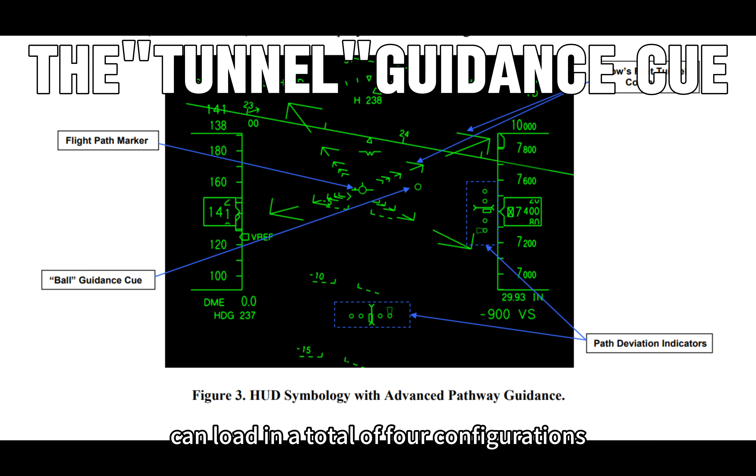The team conducted their experiment on a modified Boeing 757-200 flight simulator, the main addition being a head-up display that the researchers can load in a total of 4 configurations, them being: 1. Enhanced Flight Vision System plus Traditional Guidance Cue.

2. Enhanced Flight Vision System plus Tunnel Guidance Cue. 3. Fusion plus Traditional Guidance Cue. 4. Fusion plus Tunnel Guidance Cue.

Yes, guidance cues. The ability to display computer-generated imagery of the environment outside also enabled researchers to make the guidance dynamic. The scientists hope that using the new tunnel guidance cue will be literally like playing a video game, but it is still a new concept that needs sufficient testing.

24 pilots are being cycled through 4 sessions, each being a new HUD config, and after 9 hours of immense simulator time, all the data are collected and ready to be analyzed.

After months of data analysis, the results are finally available.

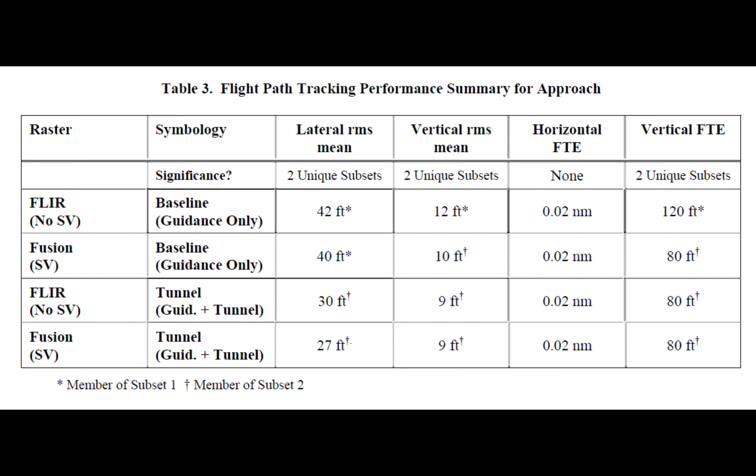The path control segment of the study shows the guidance cue selection makes a great difference, with the tunnel design significantly improving landing accuracy, while the difference between Fusion and EVS is small in comparison. Fusion still provides slightly better accuracy.

As to workload, discussions with the pilots show that Fusion plus Tunnel has a workload substantially lower than the other three, which is surprising to some researchers who fear the excess of info might overload the pilots.

The paper commented, 'The presence of the tunnel gives the pilots a better understanding and appreciation of the curving, descending visual arrival path.' Also, the SV component in the Fusion HUD concept provided significant terrain information unavailable in any other cockpit displays, thereby providing an intuitive conformal display of terrain and pathway information. Therefore, the improvement of situational awareness is also apparent.

However, one question still needs to be answered. Is this safe? The aviation industry is delicate, and any new technology needs to be super safe for it to be approved. To answer this, the research team injected non-normal situations into the scenarios, including runway incursions and navigation errors.

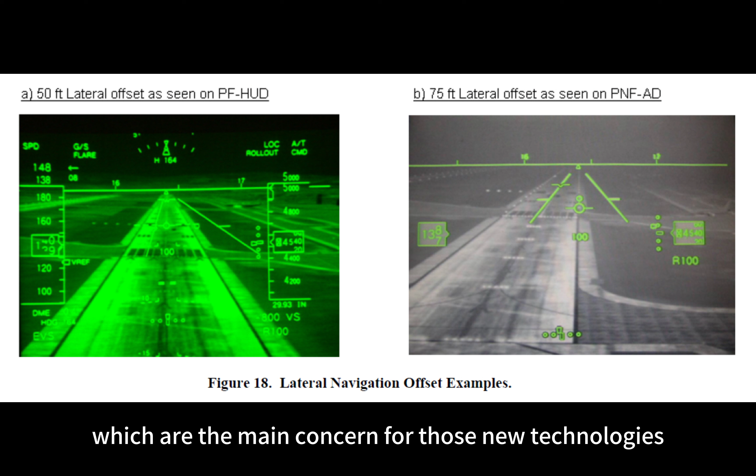In the runway incursion scenarios, the presence of EVS theoretically improves the visibility and increases the visual range of anomalous objects, but in practice it does not introduce any significant differences. Navigation errors, which are the main concern for these new technologies, turn out to be relatively easy to identify and do not appear to be a threat to flight safety.

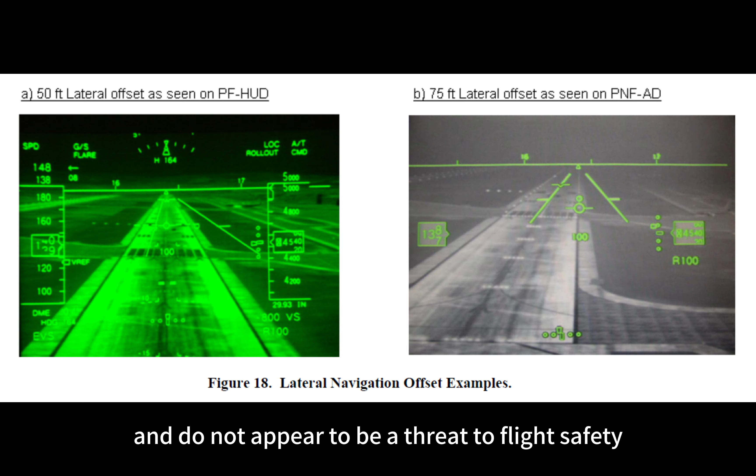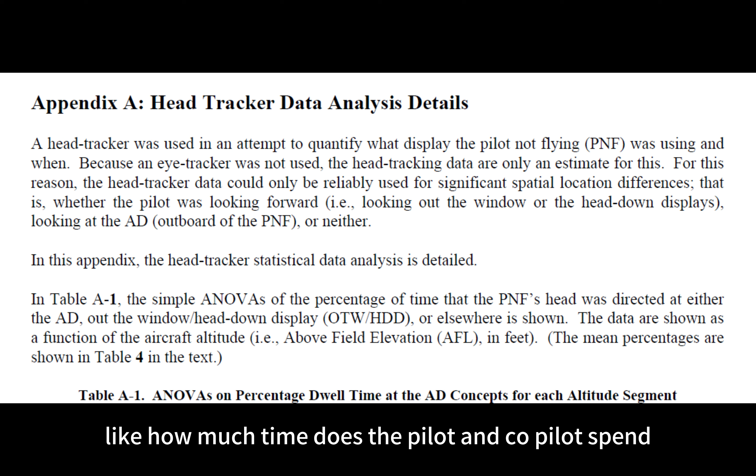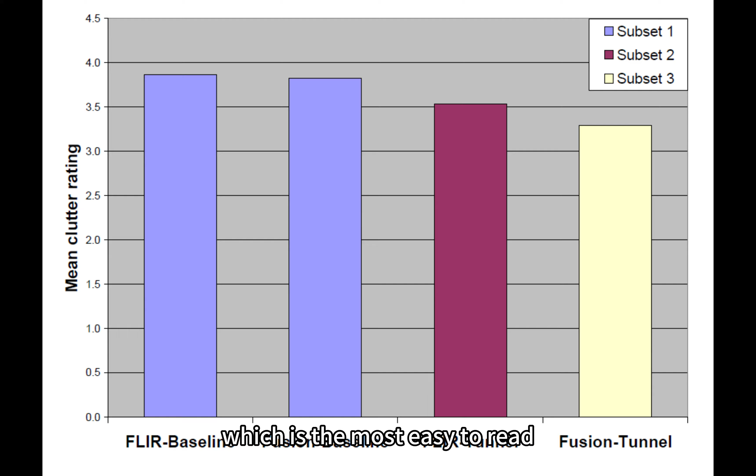There are also many other interesting aspects of the study, like how much time the pilot and co-pilot spend looking outside the window versus into the HUD, which design is the most decluttered, and which is easiest to read. We won't answer these questions in this video. However, the original paper is full of insight, and I strongly recommend everyone to read it.

Following the publication of this study, companies like Garmin, Collins, and Honeywell utilized the conclusions of this paper and improved their products. For example, the Garmin G1000 synthetic vision technology introduces a new guidance cue that's practically the tunnel design from the study. And Rockwell Collins lately invented a brand new technology, the Combined Vision System, which resembles the Fusion concept a lot.

In short, these synthetic vision and enhanced vision technologies are proven to be reliable and safe, and they will lead to the development of next-gen aircraft. I am hoping to see, in the future, every aircraft equipped with a system that looks like this.